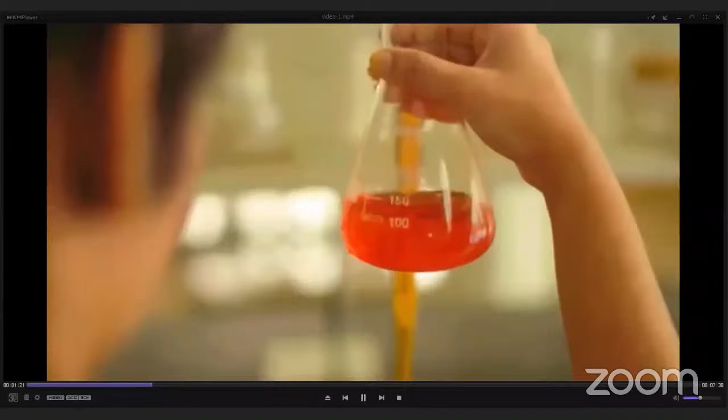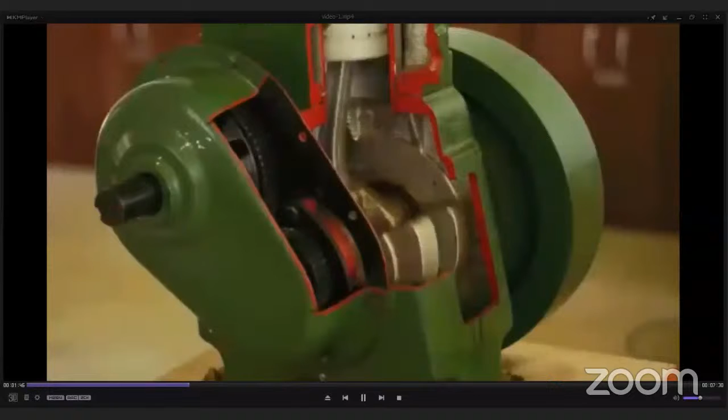Imagine a college which assists you to begin your own startups. College is a place where you can excel in sports, where you get a platform to showcase and hone your skills. Also, you will get many opportunities that will help you become self-confident and rediscover yourself. You can inspire each other, ideate, and grow together.

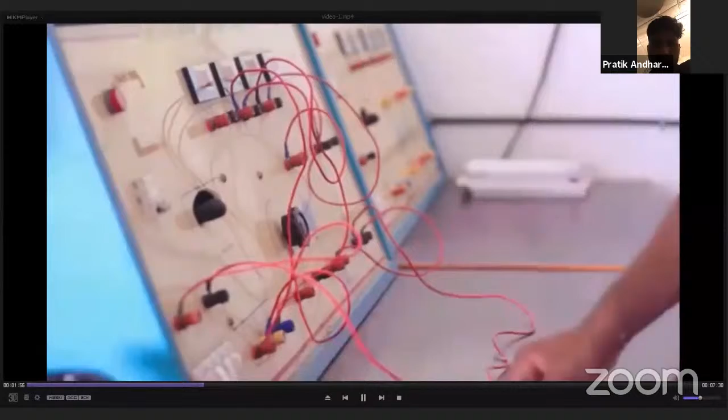It's not enough to just know your subjects. The real learning is in redefining them and living by them. Of course, there'll be books, exams, classrooms, but there's one important thing that you cannot be taught from books, an essential factor. That is life.

Hi, this is Divya Prasad, Training and Placement Officer, JIT Davangere. Coming to the placement part, every year we are providing quality training for the pre-final year and final year students, such as communication skills and aptitude training, and moreover, 200 plus students are placed every year in top companies, from Wipro to startup companies. I'm very privileged to work for the Jain Institute of Technology, Davangere.

Myself, Dr. Manjunath P.S., the principal of Jain Institute of Technology, Davangere. Jain Institute of Technology, Davangere belongs to Jain Group of Institutions, Bangalore. Dr. Chenraj Roychand Jain is the chairman of Jain Group of Institutions. Jain Institute of Technology, Davangere is located adjacent to the National Highway near Davangere University. It started in the year 2011 with 5 branches of engineering and 1 PG course, MBA, and we have 3 research centers.

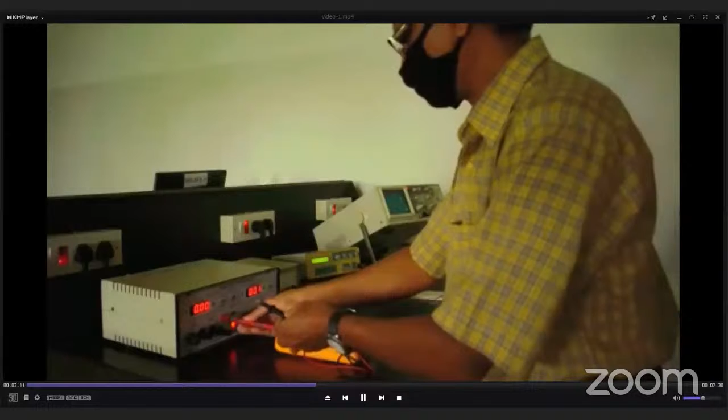In JIT Davangere, we continuously strive for quality education for the students. We have received the first rank and gold medals in the year 2017-18. We have an MOU with R&D research centers, industries and companies. They continuously support us to guide the students for research and placement. On an average, nearly 200 students are placed in various companies every year. We have well qualified and experienced faculty members to guide our students continuously. We have both boys and girls hostels and transportation facility for students from various locations of Davangere.

The difference made by college experience in our lives is more than we thought. But to achieve that, you need to study in a good college that fulfills all these aspects. So even though we go to college for education only, we'll be richer by a lot of experiences when we walk out of there. And you need good experiences to build

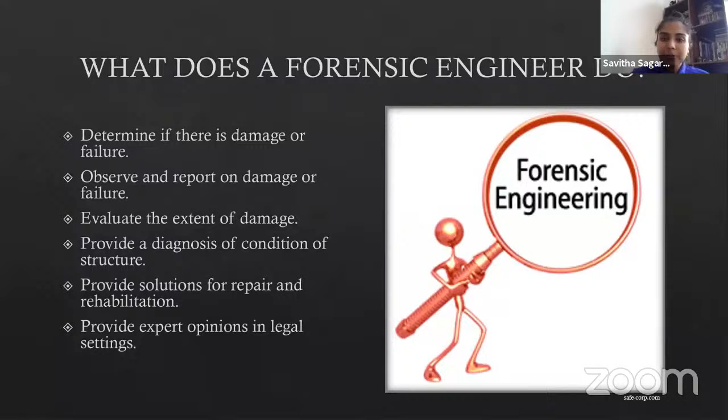So what are the skills that a forensic engineer would require on the field? So the first one is, of course, planning and organizing. So you need to know what you're investigating. So you need all this information before you actually step onto the field itself. The next one is, what kind of information do you require from your client? What is the kind of damage that is expected? What is the equipment that you would need for investigation? Do you require a subject matter expert, or are you the subject matter expert?

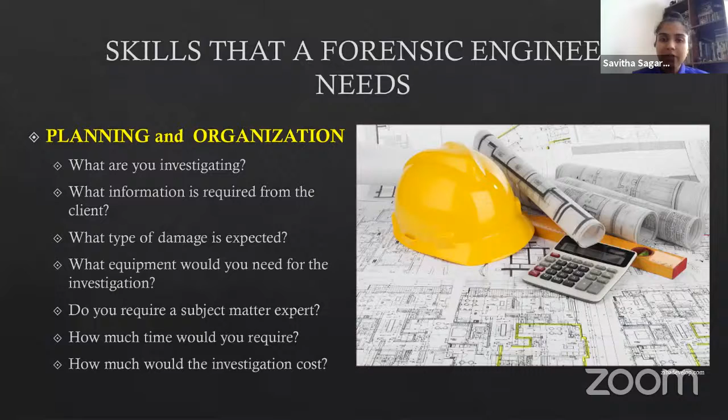The next one is, how much time do you need and how much would this investigation cost? Because most of these jobs are per hour basis. So the amount of time you spend is how much money you make out of it. So you need to have all this prepared in order to save money and time for yourself and for your client. The next set of skills that a forensic engineer would require is expert technical knowledge.

So you would require knowledge about building materials, structural analysis. So when it comes to building materials, you need to know concrete, steel, masonry, wood, polymers, etc. Structural analysis, you would need to know design of steel, reinforced concrete, pre-stressed concrete, behavior of materials and structures under loads. And when we talk about geotechnical engineering, you need to know about foundations and soil. And then you also need to know about durability concerns and the kind of durability mechanisms that you can expect in a situation like this.

You need to have knowledge about construction management and planning. You need to know how to design or to see what is the fault in plumbing, electrical, HVAC systems, etc. And you also need to know what are the testing practices that are available for you to find out what the issue is. So basically, you need to keep up with all the new technologies and the materials and methods that are available to you.

In addition to just the technical skills, you also need a large amount of soft skills because you need to be able to explain technical problems to clients, which means you have to be able to explain a very technical or a civil engineering issue to a layman and be able to convince them. You also have to provide technical reports. So you have to have a good amount of writing skills as well. You also need to provide expert opinions in legal settings. So you have to be able to explain what the issue is in legal terms.

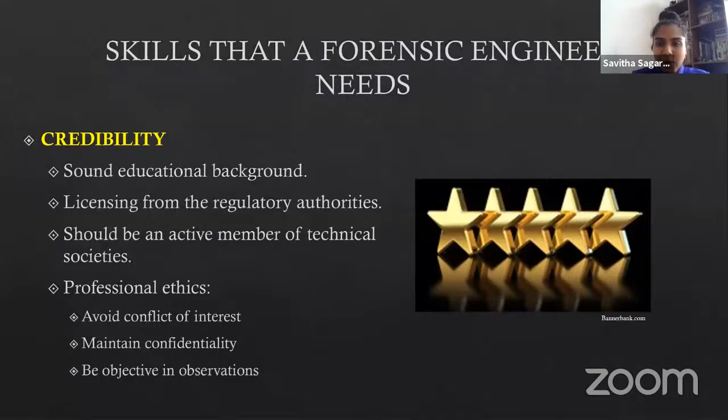And of course, you should be professionally ethical. So you should avoid conflict of interest when possible, maintain confidentiality, and be very objective in observations. So you have to be very impartial. If you lose credibility once, that is the end. So making a mistake is not a crime, but hiding and lying about it is definitely a crime, especially in a legal setting. So maintaining your credibility is the most important thing as a forensic engineer. So if you want your 5-star rating, you have to make sure that your trust isn't lost.

Essentially, forensic engineering is about solving problems. So if you're a fan of, say, Agatha Christie or Sherlock Holmes and you like solving mysteries, forensic civil engineering is a great profession for you. You can put on your thinking cap and solve problems while also saving lives and money. A lot of these problems that you come across will be tricky and you need to think outside the box. And you'll also have to look for innovative solutions.

For example, my forensics professor once asked me how I would determine the age of a crack on a floor. And I was going on and talking about how I would find a microscope or a magnifying glass and examine the edges of this crack. And if the edges were worn out, it would mean that the crack was an old crack, while if the edge was sharp, it would be a new crack.

And my professor said he would just shine a torch down the crack and see if there was any dust in it. So if there was dust, it would mean that the crack was an old crack. If there was no dust, it would mean that the crack was a new crack. So part of your work as a forensic engineer is to know how to get solutions easily and quickly. And that only comes with experience and time.

So if you want to improve your skills as a forensic engineer, the best thing you can do is keep an eye out for failures always and keep trying to solve them whenever you get a chance. So if you see a crack or anything anywhere related to buildings, try and solve it on your own and see if you can get an answer.

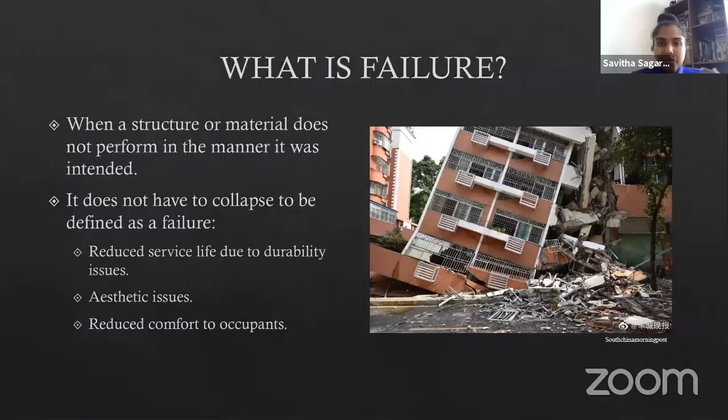So let's talk about failures now. When a structure or material does not perform in the manner it was intended, it's called a failure. It does not necessarily have to collapse to be defined as a failure. Failure can be reduced service life due to durability issues. It can be aesthetic issues where you cannot use the structure as it is intended, or when it reduces comfort to occupants. For example, this is not a broken down building or anything, but it is still going to be considered a failure because there is water pooling where there should not be any water pooling.

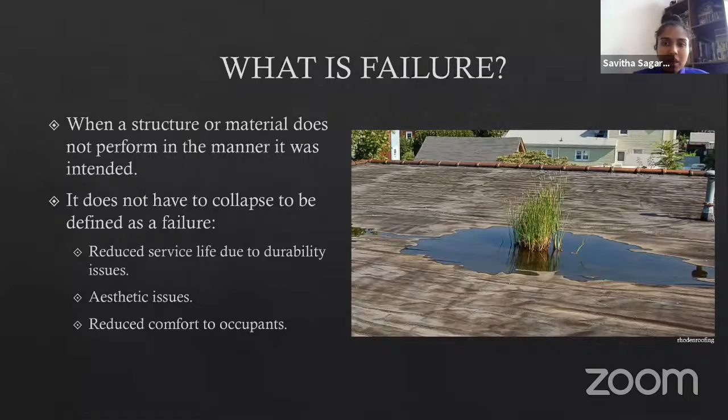So how do you prevent a failure? It's very simple. You just have to have rules on how to construct properly. And this you can do by observing previous failures and using sound engineering principles. So building codes are the way we deal with this problem of failures, or how to avoid or reduce the amount of failures that happen in built structures.

Building codes are generally developed by a very democratic and deliberative process that applies improvements incrementally, which means that each improvement or each change is made in very small increments. And it's done after a lot of discussions and deliberations. So the provisions in a code are very thoroughly examined and vetted by a team of high-level industry professionals before they're ever put in practice. And these changes happen very slowly and over time.

So if you ever attended any of these sessions where building codes or codal provisions are discussed, you will see how deliberative people are. Each word is debated before it's put in. This is done generally to avoid any accidental misunderstandings that happen when a third person is reading them. Building codes can be used for both designed-in components, such as foundations, or operational and maintenance aspects of buildings, such as HVAC systems.

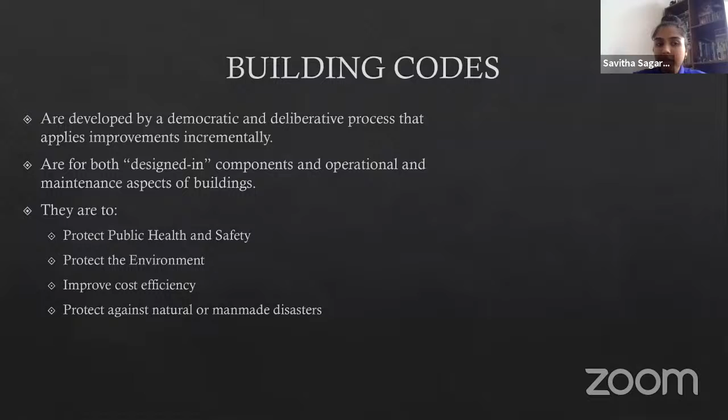They exist to protect public health and safety, protect the environment, improve cost efficiency, and protect against natural or man-made disasters as much as possible. So the goal is to build everything right. You build the right thing, build it fast, and build the thing right. So our goal is to basically build it right. Codes set minimum requirements for building design and construction to protect health, safety, and natural resources.

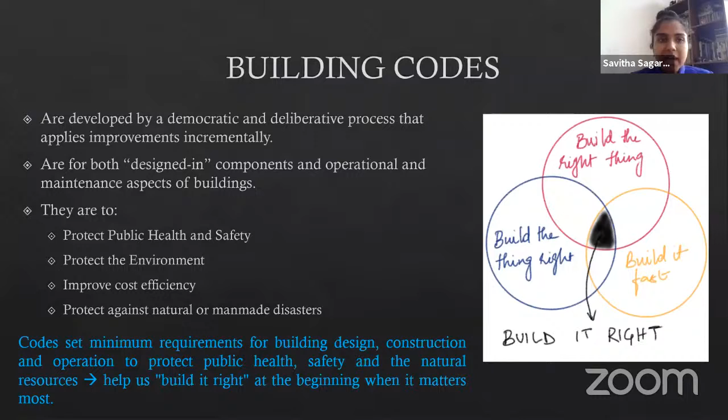So if we look at the history of building codes, the earliest known code that we have is the Code of Hammurabi, who was a Babylonian king in the early 1700s BC. It is generally considered to be the oldest existing building code that was enforced by law. However, it is more of an if-else system of rules for what punishment should be levied if a construction failure occurs. It doesn't really give you any rules on how to construct a building.

So it's something like that. Technically, a code is one that can be enforced by a court of law, such as this one, because the king would usually take into account, and then he would be the one passing judgment when things like this happen. However, there are plenty of other codes in ancient cultures which were generally used to guide construction processes, even if they weren't really enforced by a law. So we'll just call these rules and then we'll talk about them as well.

So here is some history of building rules from India. So we do have Vaastu Shastra, which still exists, but a lot of this knowledge has been lost to time and invading forces, which has led to the engineering and architectural aspects of this getting so diluted that now it's seen more like a superstition than a science. So there are plenty of other documents on building codes in Indian systems itself; if you just do a quick Wikipedia search, you can see a huge list of documents that can be used.

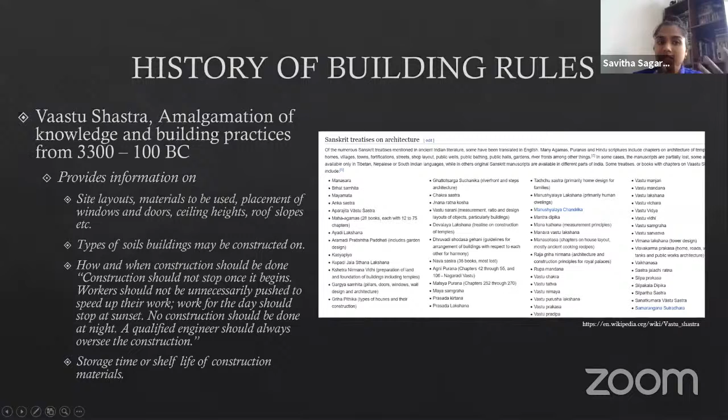The next one gives you information on how stairs have to be built. The next one is on the depth of pillars, or how deep you have to embed pillars in order for them to be steady. The last one gives you design for detailing of houses for citizens.

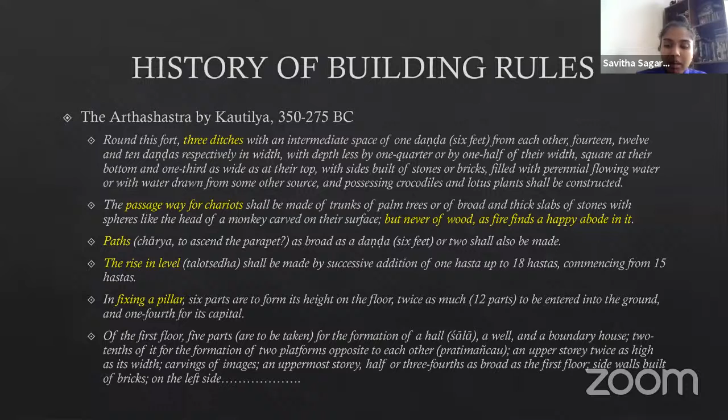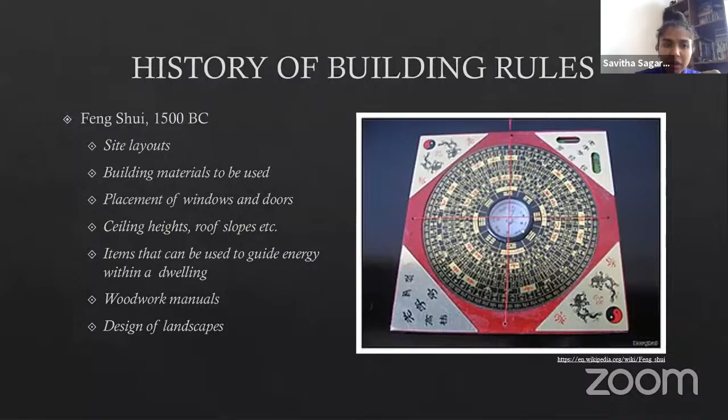We also have Feng Shui from China, which gives you information on site layouts, building materials, where to place windows and doors, ceiling heights, what are the items that you can use to guide energy within a dwelling, how to construct woodwork and wood-based items, and also how to design landscapes. So those were just the history of olden codes. And now we can also talk about the history of more modern codes.

So after the Great Fire of London, the UK enacted the Rebuilding of London Act, which had a lot of information on how to construct buildings safely. There were also urban planning rules for Spanish colonies when they were invading other countries, called the Law of the Indies, 1680. And then there was also another London Building Act, which built upon the Rebuilding of London Act, by the National Building Code in the UK again.

We also have the Uniform Building Code by the International Conference of Building Officials, which is a legacy code for most of the present-day building codes that we have. We also have the latest International Building Code by the International Code Council. The International Code Council is a non-profit organization that provides a wide range of building safety solutions, including product evaluation, accreditation, certification, and training. And it develops model codes and standards that other countries adopt to construct safe, sustainable, affordable, and strong structures.

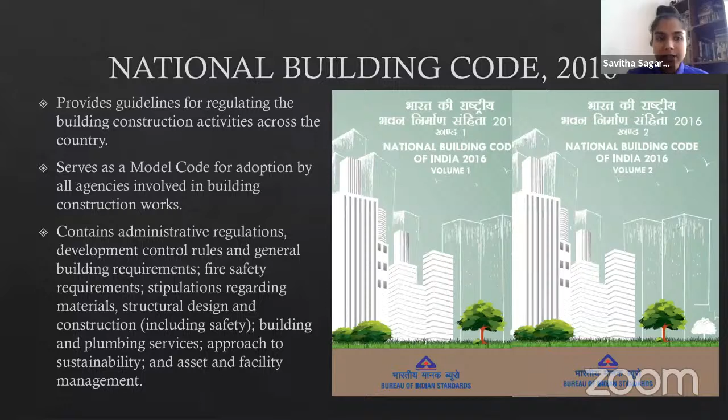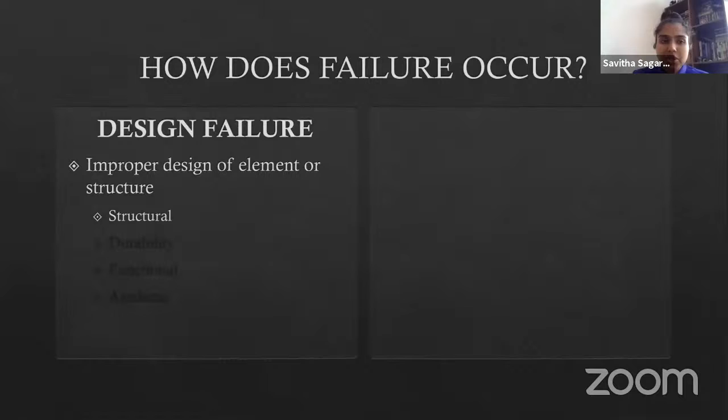So how does failure occur? So the first mode of failure that we talk about is design failure. So this is basically improper design of element or structure. So this can be structural, it can be a durability problem, it can be functional, or it can be aesthetic, or it can just be a really bad design.

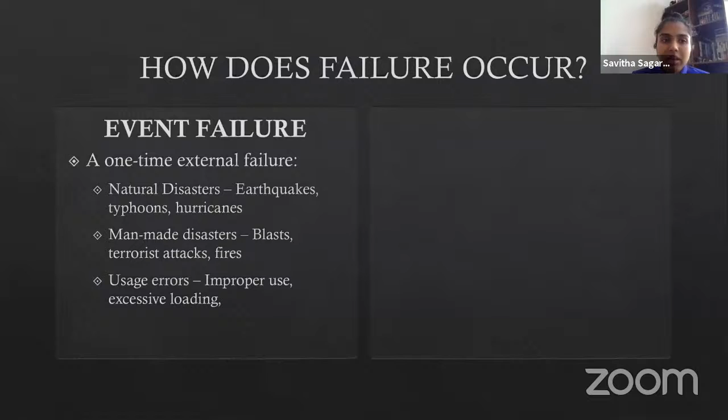The last one is mixed mode failure. This happens when two or more of the previous kinds of failures occur together. So for example, a steel bridge is corroding and it experiences an earthquake, or an aging pier is showing signs of leaning and is overloaded, or an improperly nailed roof gets ripped off during a tornado.

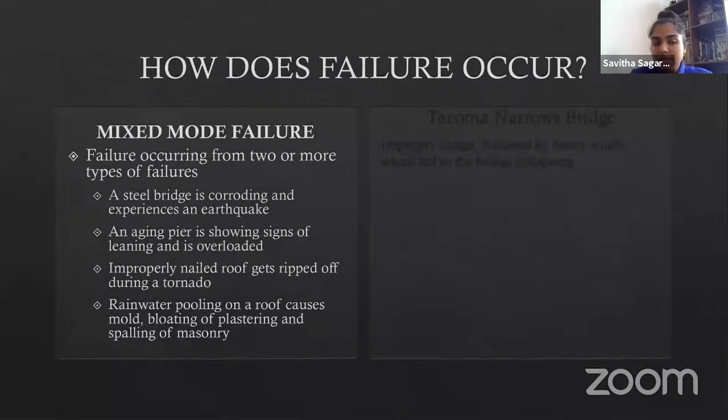The other one is you can see rainwater that's pooling on a roof, which causes mold, bloating of plaster, and spalling of masonry. For example, here's the Tacoma Narrows Bridge, which had a really bad design, and it was followed by heavy winds, which led to the bridge collapsing.

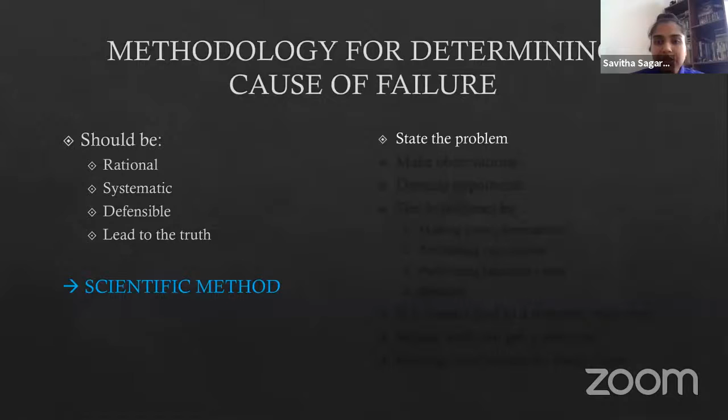So how do you determine the cause of failure? So there should be a clear methodology. So your method should be rational, it should be systematic, it should be defensible, and it should lead to the truth. So the way we do this is using the scientific method. So the first step in the scientific method is you state the problem. The next one is you make observations, develop a hypothesis.

So when you develop the hypothesis, you're going to test your hypothesis: you make more observations, perform calculations, do some lab testing, and you research. So you can find previous cases similar to your present case using research. If this doesn't lead to a solution, you start over again, and you go back and start developing a new hypothesis. And you repeat these steps until you get a probable solution, and you develop conclusions for this likely cause. So this method gives you a reasonably accurate guess on what the probable cause of failure is.

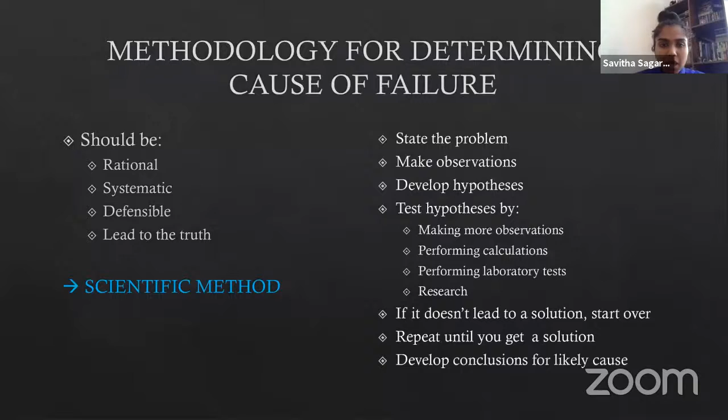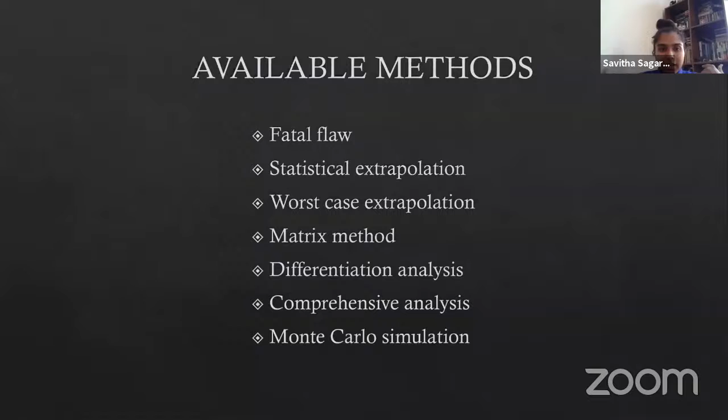It is impossible to determine the actual or true cause of failure each time. So what you're looking for is the most probable cause. So there are several methods that are available for failure analysis of structures, and I'm going to list some of them here. Each of these is a topic on its own. So we're just going to take a look at these. So from now, we're going to start discussing some actual failures.

So the first one is a leaning tower. So the Leaning Tower of Pisa is one of the most famous failures, but leaning towers are quite common. The most famous one, though, is the Leaning Tower of Pisa; it was a design that was flawed right from the beginning. So it was a 200-foot tower that's tilted at a 5.5-degree angle. So the tower began to sink right after construction had progressed to the second floor. The foundation depth was around 3 meters. It was built on very weak and unstable subsoil.

And to compensate for the tilt that started appearing when it was at the second floor, the engineers started to build the upper floors with one side taller than the other. So the final tower sort of ended up being curved. So one of the really cool things about this tower is that it has experienced at least 4 strong earthquakes since 1280. But this tilting, apparently very vulnerable tower has survived this long. And researchers were very surprised, very excited to know why. So they started researching it.

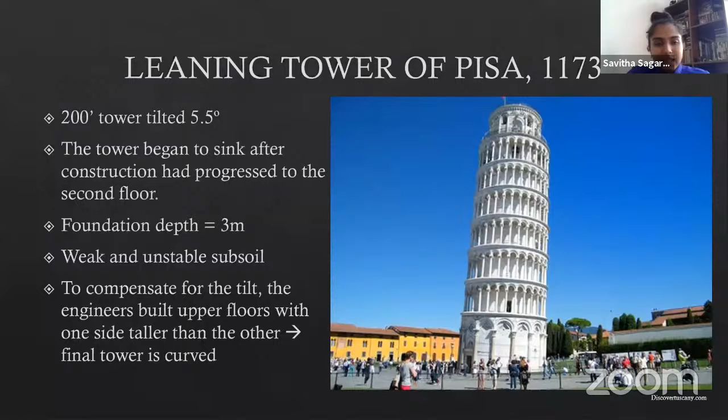And they concluded that the reason was because of the dynamic soil structure interaction under the tower. So the height and the stiffness of this tower, along with the very soft subsoil that was there, influenced the vibrational characteristics of the structure in such a way that when the earthquake occurred, the building did not resonate with the earthquake motion. So basically, the same soft soil that was causing this leaning problem was also the one that helped it survive this earthquake.

So after nearly 20 years of studies, people started to see what the problem was and try and fix it. So what they did was, soil under the raised part was removed. And then they also stabilized the soil under the sunken portion. And they also placed counterweights to prevent the tower from tilting anymore, and also attached anchoring cables to the third level.

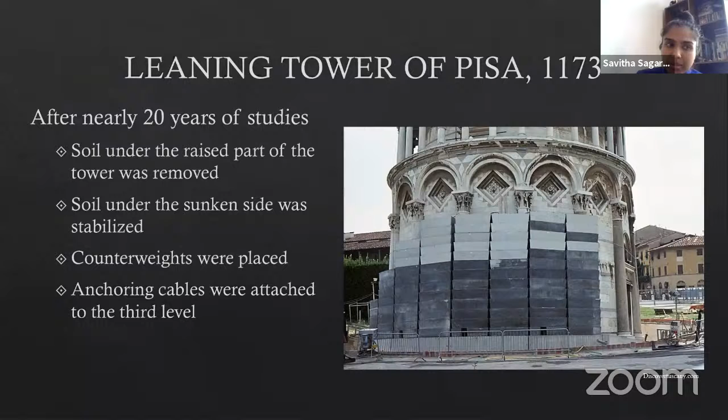So this next one is the Tacoma Narrows Bridge that we spoke about earlier. So this is a very famous failure that was caught on camera, which is something that doesn't really happen a lot. But it has been used as an example of how not to construct a bridge in physics and engineering classes for nearly 60 years now. And the bridge was nicknamed Galloping Gertie for how it moved when it was about to collapse.

So the bridge showed extreme movement whenever there was any wind once the deck was placed. And this was before construction was even completed. And the workers complained that there was an issue with the bridge moving around each time there was any wind. So during construction itself, a lot of damping measures were adopted to prevent this wind problem.

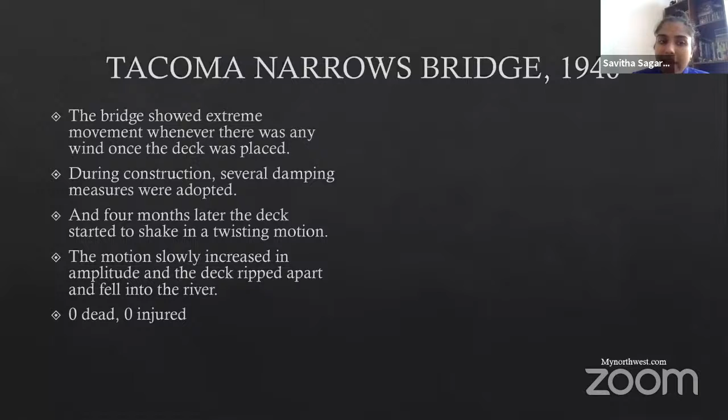However, after 4 months of opening the bridge, the deck started to shake in a very twisting motion when there was a heavy wind. And this motion slowly increased in amplitude, and the deck just ripped apart and fell into the river. But there were 0 dead and 0 injured.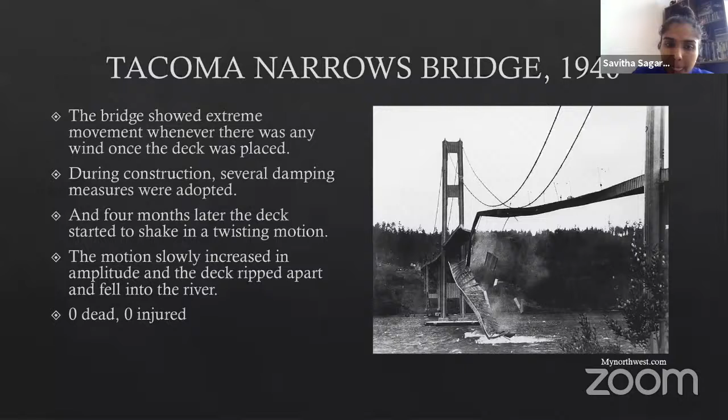The next one is the collapse that happened at Hyatt Regency in 1981. So till now, we talked about failures that didn't have any casualties, but that's not always the case. Some of these building failures can have very disastrous results and can cause a huge loss in human lives. So this was an elevated steel walkway in the atrium of this Hyatt Regency hotel that collapsed during a party.

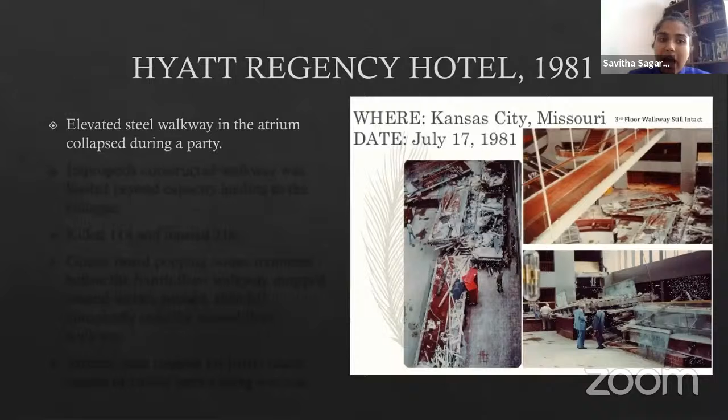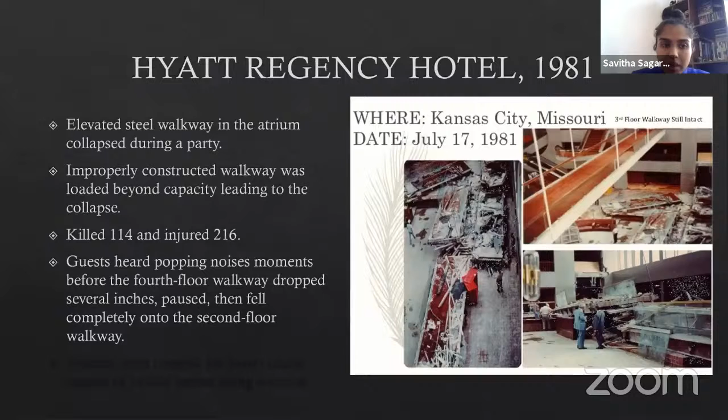So the walkway wasn't constructed properly and was loaded beyond capacity, which led to the collapse. So it ended up killing 114 people and injured around 216 people. So guests could hear popping noises moments before the 4th floor walkway collapsed and fell onto the 2nd floor walkway. And victims were trapped under tons of rubble before being rescued.

So the fire department couldn't even remove this large quantity of rubble. So they had to ask volunteers to bring construction equipment to help move all of this stuff. In addition, the sprinkler system had activated because of the dust, and it flooded the whole building, putting trapped victims at a danger of drowning as well.

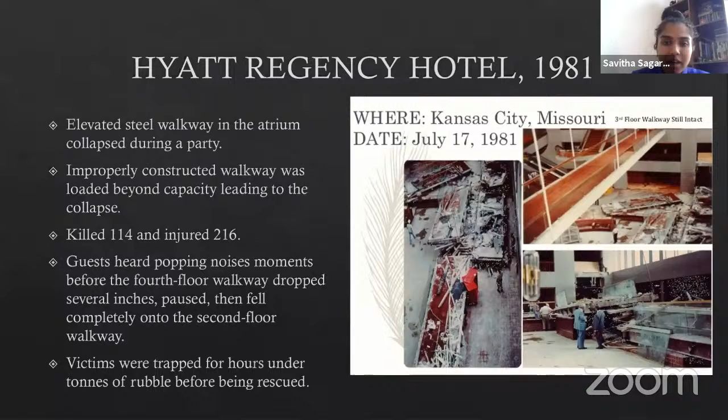Visibility was really bad because of the dust, and they had to keep the power turned off to prevent any accidental fires or electrocutions because of the water as well. So they had to ask people to donate generators to keep the power running and things like that. So it was a pretty bad disaster.

So the fourth floor beam had to support the weight of both the loads, both the fourth floor slab as well as the second floor slab, along with all the people that were on it. So the manufacturers of these rods had issues at the time that these rods might need to be threaded the entire way. So this could be damaged when the walkways were hoisted and constructed.

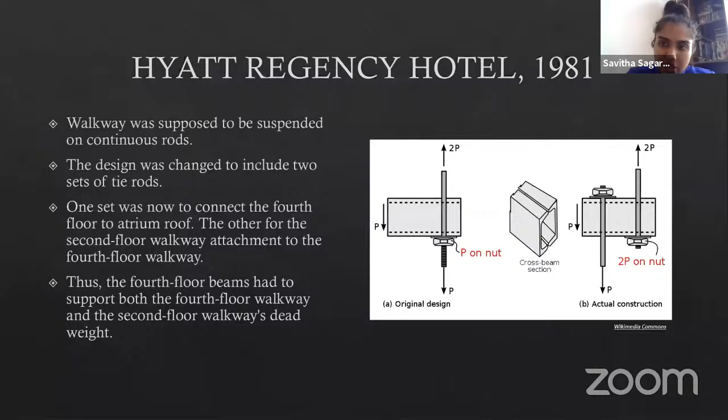So what are the causes of, one second. There's another failure here. That's the Pier 34 collapse that occurred in early 2000. So this pier in Philadelphia collapsed. And the nightclub that was at the end of this long pier collapsed into the river. 41 people fell into the river, and 3 of them ended up dying.

So the pier was originally constructed in the late 1800s and was expanded in 1909. But in 1978, they estimated the lifespan to be about 12 years. So in 1992, when a nightclub was opened, the pier had already crossed its service life. And in 1994, a dive survey was performed, and they found that a few of these piles were leaning. And it was suggested that the piers be rebuilt. However, this suggestion was rejected by the owners.

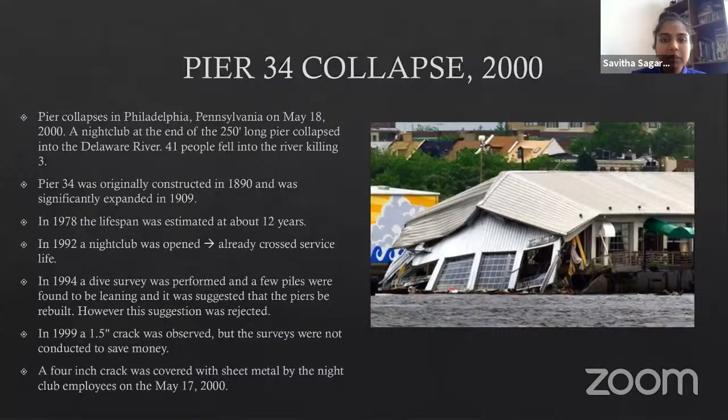And in 1999, they saw a 1.5-inch crack, but surveys were not conducted to save money. And a 4-inch crack that appeared in the pier was covered with sheet metal just the day before the accident occurred. So this is what the intended structure was, but this is what happened. This is what was happening when the structure actually collapsed.

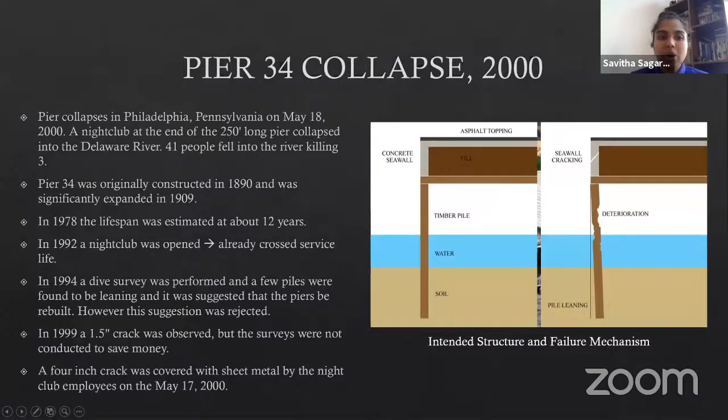So here we're going to list what the probable causes of failure were. So the first one is that it's possible that these pilings may be damaged by exposure to heavy ice buildup the previous winter. The next one is that there were probably cracks in the surface, and the damaged seawall sort of led the pile to go out of alignment. The next one is that these old piles were not protected against pests, so they had to suffer countless wetting and drying cycles, which would have weakened the wood.

And the last one is that it's possible that during high tide, the water which was acting as a brace to protect this deck wasn't there during low tide, which led to the support of the water not being there, which would have caused the collapse. But after a lot of investigation, they were trying to see what the most probable cause was. So the actual cause of the failure was never found, but the following causes were probably most likely.

So the first one is that the old wood had started rotting because of the wetting and drying cycles. This was actually found out even before the accident. The next one is that the seawall cracked, allowing the infill to escape, causing the piles to start tilting. The next one is that the low tide caused additional stress on the pilings, and the bracing that was offered by the water was lost.

And it's also seen that the pine piles were already leaning before the collapse, and the piles were found cracked at about 2/3 height. So the evidence sort of showed that the pier and the manager of the club were aware that there was a lot of danger of collapse, but they didn't really do anything to prevent the problem. So they were charged with third-degree murder, causing reckless endangerment and failure to prevent catastrophe.

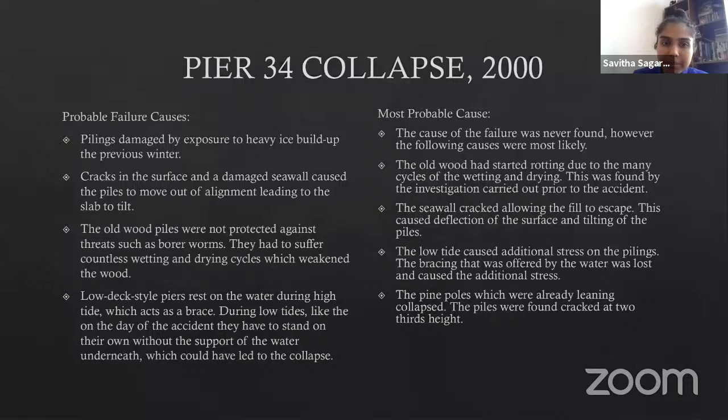So let's talk about what are causes of building failures. So we already saw some of these very dramatic failures, but most of the failures that we come across in our actual life are pretty mundane. They're not this dramatic. So most of it is caused by things like long-term durability issues like corrosion or freeze-thaw, ASR, DEF, things like sulfate attack. And in addition, it's also things like improper detailing or inadequate codes, or when people are reading these codes, they don't understand it properly.

There's also improper construction practices where there's an emphasis on trying to save money, so things are not constructed well or materials are not used properly. The other one is improper inspection during construction or improper usage of these constructed facilities. There's mistakes, errors, omissions, lack of communication and coordination. And one of the bigger things is the lack of maintenance once the building is constructed.

So most of it comes down to ignorance, incompetence, and inexperience. So our job as designers or engineers is to make sure that everything we design is checked multiple times, and we cross-check it with other people who know better as well.

So what we're going to do now is list out the possible causes. So the reason that I know all this information about this crack is because these were cracks that appeared in my own study room in 2003. And I looked at these cracks for years and only did a failure analysis in 2015 to track down the cause.

So the first possible cause that we have here is that it's possible that high diagonal stresses were developed because of this additional wall that was pulling the damaged wall down. The next one was that it was possibly a differential movement because of non-uniform movement between these two components. The next one was differential settlement because of the supporting soil under the foundation of this wall.

The next one: was there any eccentric load inducing torsion because of this perpendicular wall that was pulling it down? The last one, of course, was moisture expansion because of absorption of water. So to see what the most probable cause is, you want to look at multiple aspects. So the first one you want to see is when did these cracks appear, at what time?

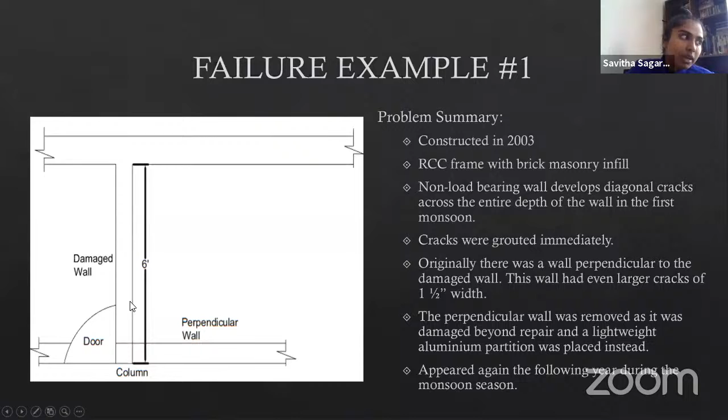So what we came up with finally, the solution was that it's the differential settlement of supporting soil, because these cracks appeared and widened during monsoon. So it's highly likely that these cracks were because of this expansive clay that the wall was built on. So originally what we assumed was that the perpendicular wall was pulling this wall down, causing the cracking. But even after that wall was removed, it still showed cracking. So that's why we decided that it was the soil which was causing the problem.

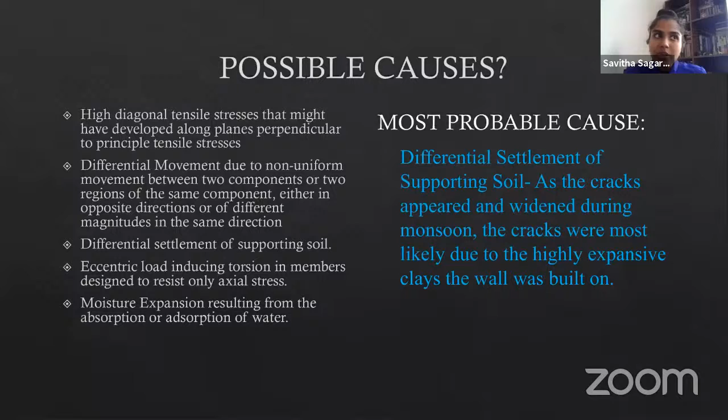So that one is the first one. So I gave you a general idea on how to go through the scientific method and then find out what the cause of cracking is. So the next ones, I want everyone to start taking guesses on what the probable cause is. So this one is delamination of plastering from masonry wall. All of this plastering is delaminated from this masonry wall. So if you want to take guesses on why that's being caused, you can let me know. Please use the chat box for your answers or for your guesses.

Okay, there's a lot of answers saying dampness, and then there's freeze and thaw here, subsidence. Okay. Lack of curing, yes. Capillary action is also possible, yeah. Again, that's related to moisture. Yeah, that's also another thing, that hacking is not done correctly for surface preparation, true. Shrinkage, yeah, that can be a possible thing. Poor cement sand ratio, yeah. Creep, we're talking about plastering here, so creep is probably not something. More silt content in sand, sulfate attack.

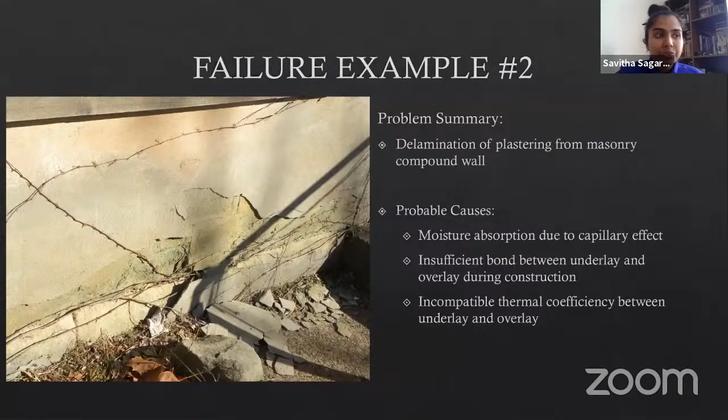First one, of course, is moisture absorption due to capillary effect. In the overlay, we can clearly see that there's no hacking done here to create a good bond between these two things. And of course, the last one is the incompatible thermal coefficient between the underlay and the overlay, which can lead to delamination occurring. High sound waves falling on the wall continuously, I don't think that's a problem, because this is a residential area.

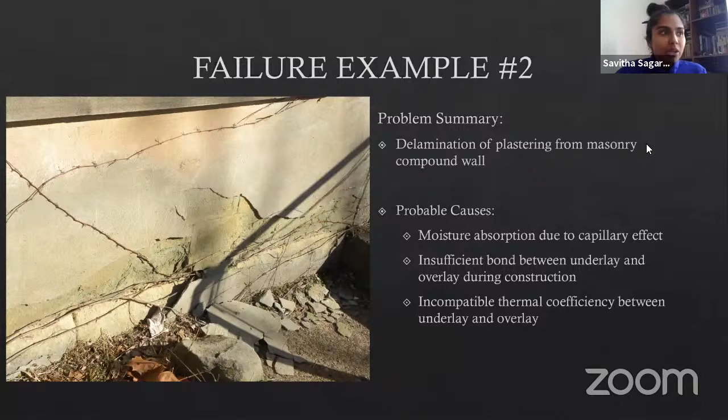Okay, so we'll go to the next one then. This one is cracking that's occurring in an external roof slab. So again, you can start taking guesses on why this cracking might be happening.

So what I have listed here is only a very small list of causes. So I would like everyone else to also take more guesses on what the problems could be. So this is heat of hydration. Probably not, because it's not really that much of a large concrete thing, right? Temperature stresses, possible. Thermal cracks, yes. Impact, probably not, considering that you don't see an impact here.

Corroded rebar. Corroded rebar is possible, but again, you don't see any corrosion happening here, right? Thermal expansion, again, plastic shrinkage is possible. Water cement ratio, yes, again, that's because of your plastic and drying shrinkage. Thermal expansion, condition of fixity. This is more of a material problem rather than a structural problem if you look at it.

Elasticity, poor quality of cement, plastic shrinkage. Again, see, things like poor quality of cement is hard to determine when you're just looking at a picture, because you don't know what the water cement ratio was, or what the quality of cement was, right? Moisture loss from concrete, yes. Lack of curing, this is a problem.

Thermal expansion, heavy moisture. So you're suggesting that there's water pooling on the roof, which is causing this? Could be due to porous action by change in climate and atmosphere. Yeah, that's also possible. Change in temperature, poor structural design, mixing ratio, improper cover. Improper cover, again, we don't know because we don't know what the cover is.

Rain. Yes, so the list of probable causes that I have here is, first one is thermal stresses due to exposure to sun because it's a roof. Next one is drying shrinkage, and the last one is lack of expansion joints. So this is a problem that we see in a lot of large concrete structures, that we don't put in expansion joints. We tend to assume that a small roof doesn't require it, but we do need expansion joints to prevent cracks, like drying shrinkage cracks, as well as thermal cracks from appearing. So we'll go to the next one.

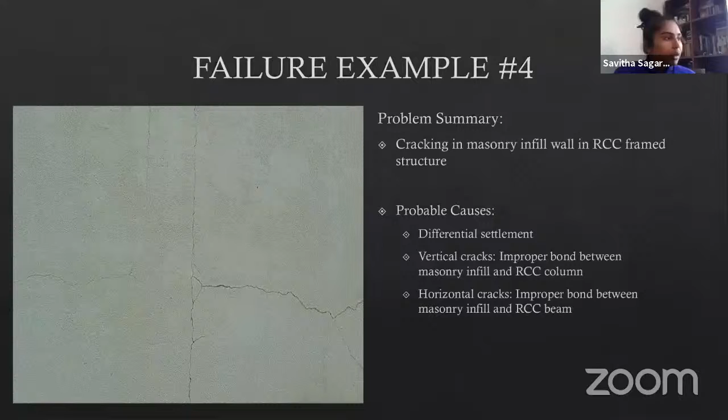So this one again is cracking in a masonry infill wall in an RCC frame structure. So I'll sort of highlight the cracks so you can see them. So what you see here is, this is a column and this is a beam here. So what you see is that there's cracking that's happening at the edges of these columns and the beams. So I have a few probable causes listed here. You can always try and add a few more.

So I think there's someone who's asking, is this ready-mix concrete? No, it's not. Poor detailing, spacing not maintained. Yeah, that's possible. Water absorption, heat of hydration, poor detailing, improper cover, deflection, bond with vertical bars, settlement crack, shear failure. Yeah, all of these are possible solutions. Any more that we can think of?

Actually, one of the most common reasons that this delamination between masonry and the concrete happens is because your mortar joint tends to shrink after some time, which causes this delamination between the wall and the RCC part of the building.

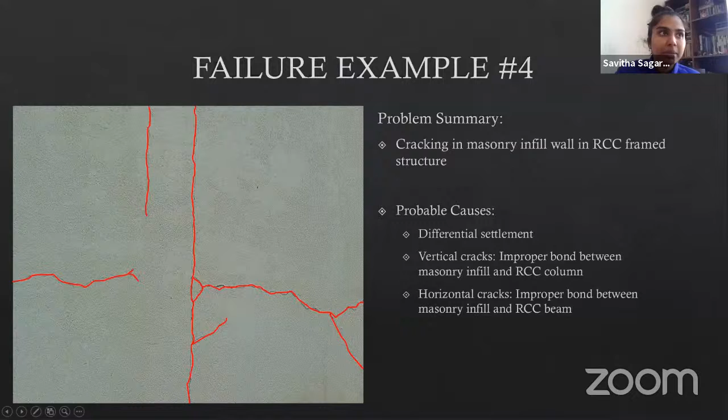Okay, here's the next one. Again, a very common problem that we see all around. When you have these long walls, so you have cracking in a 40-foot long masonry compound wall. So here's a closer picture where you can see the wall sort of move completely. Someone's taking a guess saying expansion. Yes, uneven settlement is possible. Yeah, temperature is a problem because you have thermal stresses that will happen in a wall that's that long. So when you don't have expansion joints, you have this problem that occurs in masonry quite often.

This again is a problem that can be very easily solved by putting expansion joints at regular intervals, depending on the thermal stresses that will be in your structure. Again, yes, soil settling and settling of foundation, differential settlement is another cause. There's also the problem that sometimes there's not a good enough bond between masonry units. Yeah, bad quality of bricks is also a possibility. So we can move to the next one.

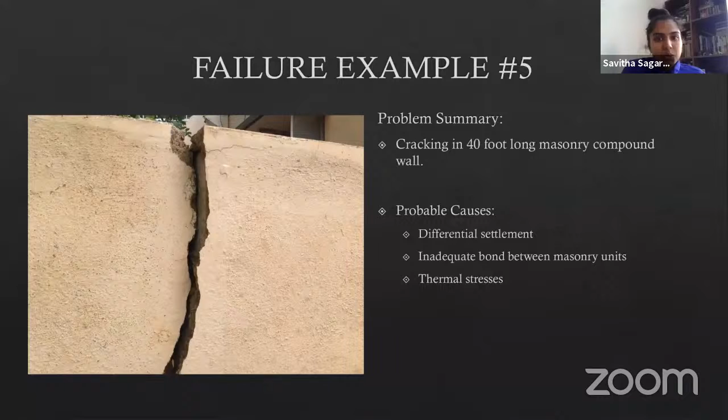So this one is seepage through a concrete retaining wall. So you can see the wetness that's coming from the infill at the back into this concrete retaining wall. And we want to see what is causing this problem. So here you can see a more close-up of the seepage that's happening. Yep, that's correct. No weep holes.

So what you can see here is also this small drying shrinkage crack that's showing up in this retaining wall that's the source of all the seepage problem. So yeah, there are, of course, all of these things that you're saying here, there's not enough weep holes, correct? But the main issue, of course, is that your concrete itself is cracking because of drying shrinkage.

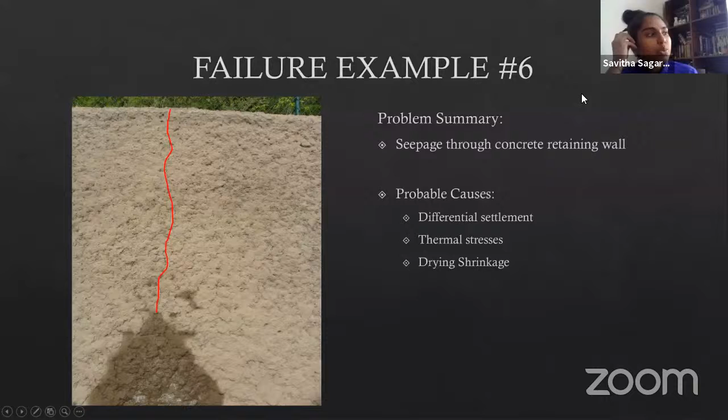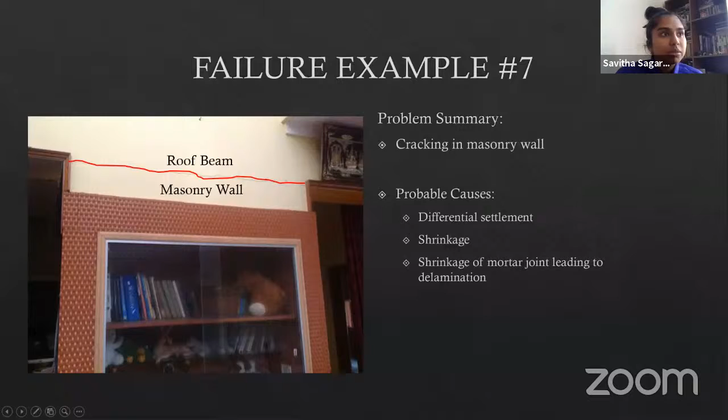So yeah, this is the next one. So we have the problem summary here. Again, we see a cracking at a beam slab connection. So yeah, improper joint is a problem. You can try more.

This one is actually a very obvious solution because you can see the corrosion products that are sort of flowing out from here, the brown rust that's coming out from the roof slab. So this one really doesn't require a list of causes or anything because you already see that reddish brown corrosion product, which is proof of the problem itself, right?

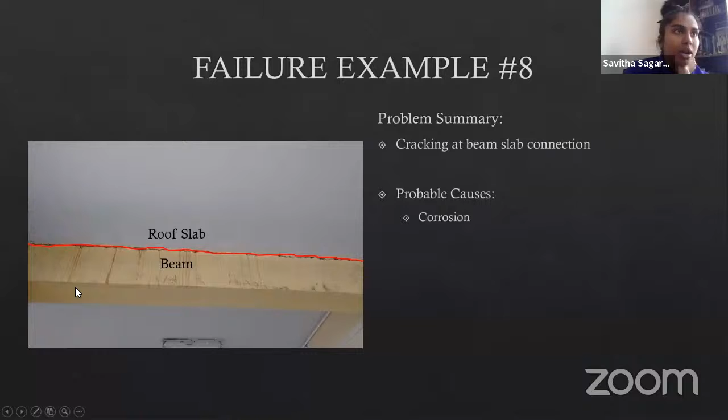Because when you have corrosion, the corrosion product, which is rust, has a larger volume when you compare it to iron or steel, which leads to expansion on the inside, which leads to cracking and spalling and delamination and things like that. So anytime you see this corrosion product flowing out like this, you can just not even worry about anything else and just say corrosion.

Okay, this next one is a very simple one. We have cracking in a concrete slab. So I've highlighted the cracks for you. These are 4 big ones and then 2 small ones. So you can take a guess on what could be the problem here.

Thermal expansion, impact loading, yeah, those are options. But you can sort of see that there's a good joint here, so thermal is not really an issue. Shrinkage, lack of curing, yes, could be possible. Lack of vibrator use, yes, probably, because the concrete might be segregated. But there's an easier or a clearer solution for this, or a probable cause.

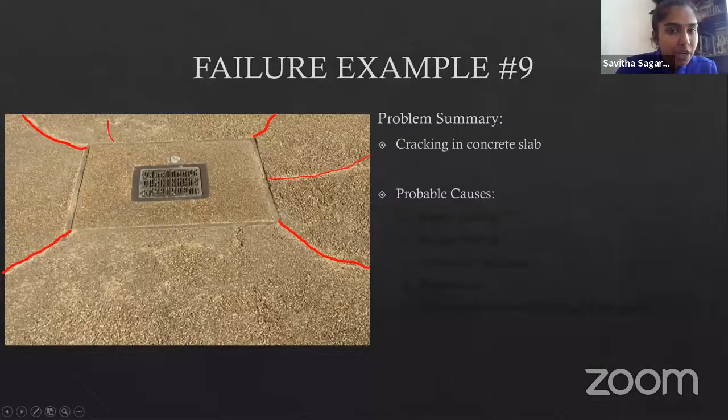So we can see the possible probable causes that I have listed. So I have impact loading, fatigue loading, differential settlement, freeze thaw, and the last one is the stress concentration at the edge of a square.

So it's very simple. Whenever you have a square design like this, you have more stress concentrated at the edges. So that's why it's suggested that we use a more circular design when we want to put manholes or anything, because this prevents the stress concentration at the edge and you have a more uniform stress distribution.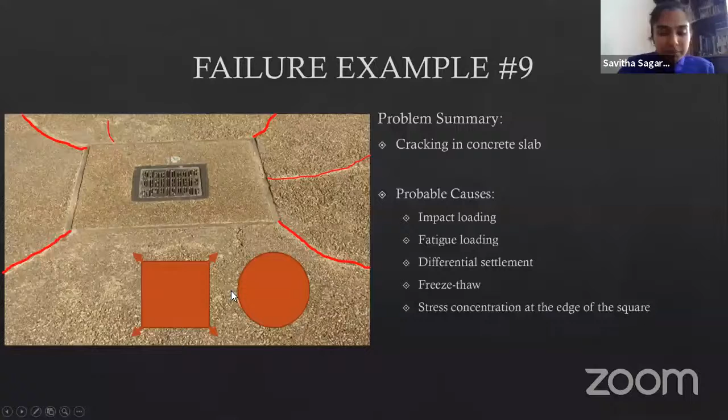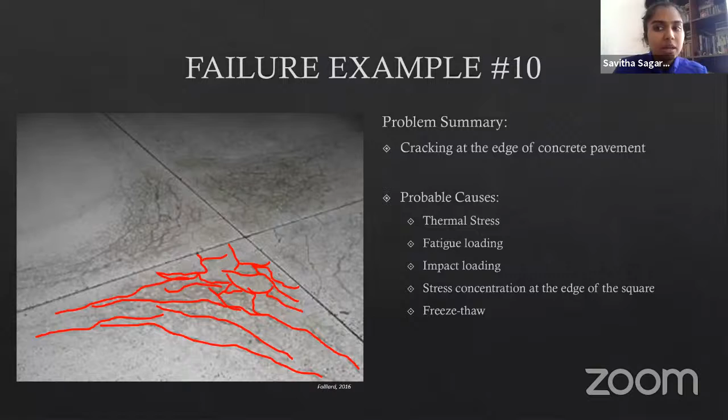And this can be easily solved by using a higher percentage of entrained air in concrete. So this is very symptomatic of freeze thaw. Whenever you see this edge D-cracking, you can easily say that this is freeze thaw. And you tend to see these only in places where temperatures fall below freezing.

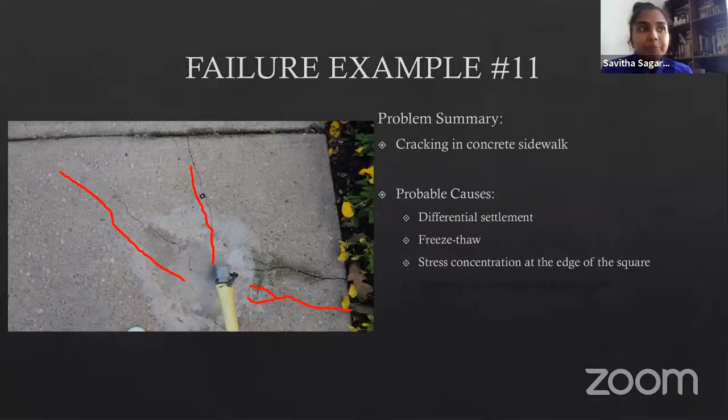This is the next one. So this one is simple cracking in a concrete sidewalk. Again, cracks highlighted. Looks like I've moved the figure a little bit, sorry. So here we have the list of probable causes: differential settlement, because this is a concrete sidewalk, freeze thaw, again, stress concentration at the edge of a square. If there's anything more, you can always try and take guesses as well.

Impacted edge, possible, yeah. There's actually a very nice clue right here with this anchored cable, where you can see all these cracks are emanating from. So it's basically just that this anchored cable is putting a tensile force on this concrete sidewalk, which is causing these flexural cracks to appear at the edge.

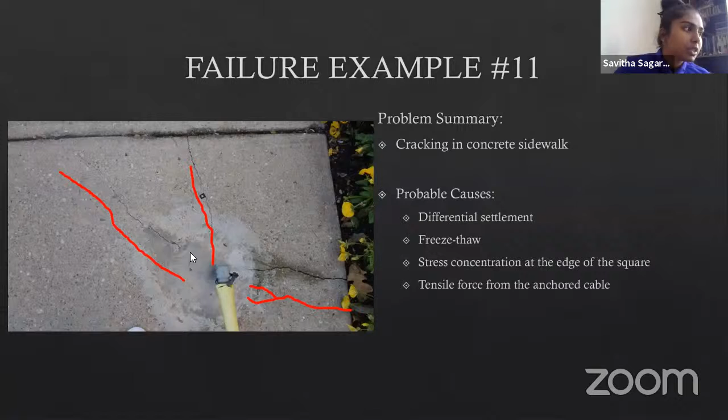Okay, this is the last one. So we have some crocodile cracking that's appearing in a concrete retaining wall. So this one is, again, if you've seen this, you will know immediately what this problem is. But if you haven't, you'll have to think about it a little more. So yeah, if you've seen it, ASR crack, someone's already taken the guess. So it's a very obvious ASR crack.

So I did have a few more things. I had things like differential settlement and freeze thaw written here. So again, expansion of what? What we have here is a telltale ASR problem. It's reactive silica aggregate that reacts with the OH- in the concrete pore solution, which then reacts with sodium and potassium ions, forming the alkali silica gel, which absorbs the surrounding water and expands, which in turn causes internal stresses, which causes this cracking.

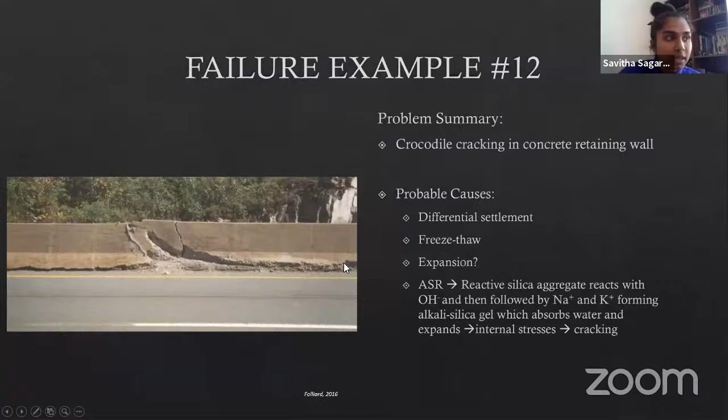So someone just asked, what is an ASR crack? I think I just explained it. It's alkali silica reaction. That happens when you have a reactive silica aggregate that reacts with the OH- in your concrete pore solution. Okay. So when ASR becomes too much, this is what ends up happening. You have a large amount of expansion, huge cracks, and a lot of spalling.

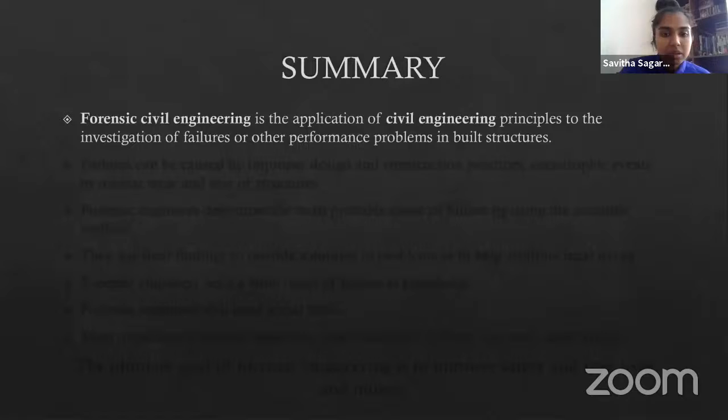So we'll end the interactive session for now, and I'll just summarize the presentation, and we can move on to the question answer session. The first one is that forensic civil engineering is the application of civil engineering principles to investigation of failures or performance problems in built structures. And failures can be caused by improper design, construction practices, catastrophic events, regular wear and tear, or a combination of one or more of these.

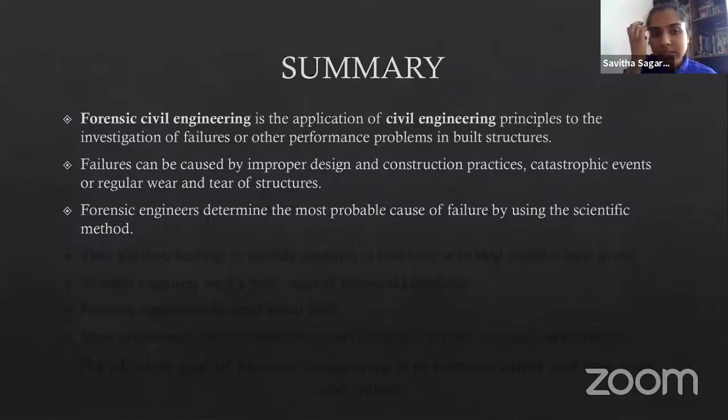The next one is forensic engineers tend to determine the most probable cause of failure by using the scientific method. They use their findings to provide solutions to problems or to help arbitrate legal issues. We need a wide range of technical knowledge: building materials, structures, geotech, durability, construction management, planning, design of different elements, and testing practices.

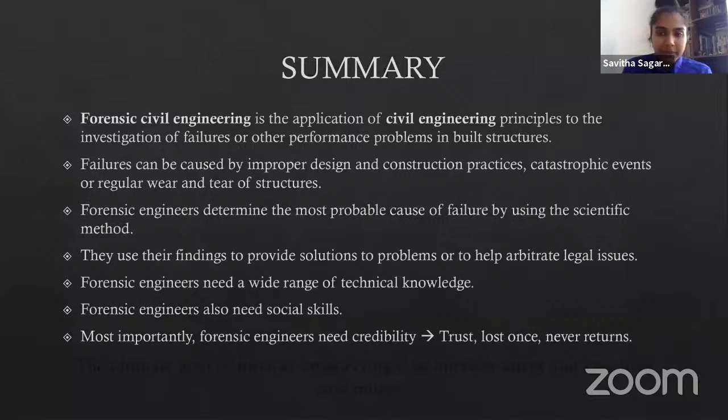We also need social skills. We need planning, organizing. We should be able to describe technical problems to laymen. We need to be able to provide legal reports and technical written reports. You need to be able to provide credible expert opinions in legal settings, and maintain a good working relationship with other people. Most importantly, a forensic engineer needs credibility. Trust, if you lose it once, you can never get it back. The goal of a forensic engineer is to improve safety and save lives and money.